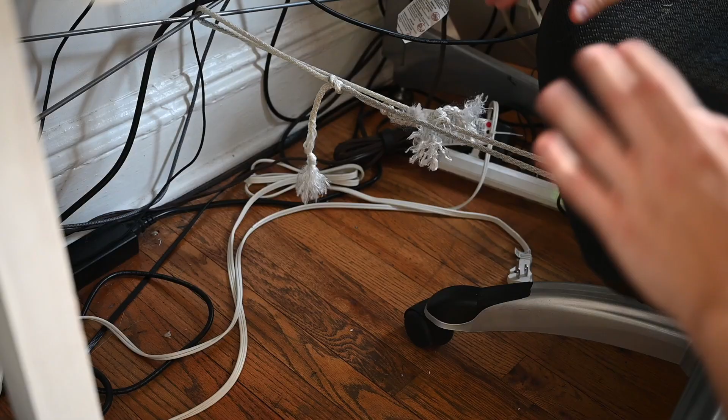This is under my desk, and this is a rope. I need this rope to tie my chair to my desk, or else this will happen.

Fuck this apartment. So I've been using a couple different tricks to try to level out this apartment to the best I can. So you saw the rope one, but I've also been using paper under a couple different pieces of furniture. But for the really big gaps, I've been 3D modeling and 3D printing some functional parts.

So this here is one of the first parts that I actually 3D printed for this apartment. Now, I've been 3D modeling and printing for about the past 6 years now, so I know a thing or two, and I'm going to walk you through sort of my process for making a functional print like this.

This guy is a cube cut out of a cube. Most of my 3D modeling happens through this one program called OpenSCAD. We're going to get more into that later. So I messed up the dimensions slightly, and that's why it kind of looks gross in the back here.

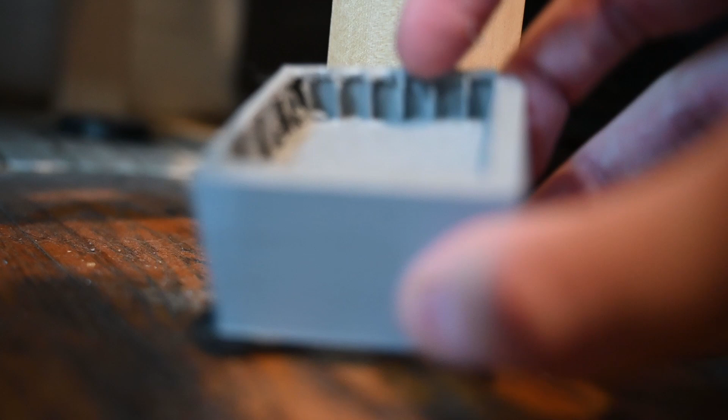I had to cut away a little bit of the plastic with a knife so that it would fit the dimensions of this square leg here. When modeling something for real life, you really want your dimensions to be close, but leave a little bit of room for error. So you want to make your print slightly larger if you want something to fit inside of it, and slightly smaller if you want your print to fit inside of something.

The usual recommendation for this room for error, which is called tolerance, is about 2 millimeters. Another thing you gotta take into account when figuring out these dimensions is something called shrinkage.

Male viewers may have a little bit more experience with this concept than others. The printer prints things nearly to the exact dimensions you give it, but as your print cools, it will ever so slightly shrink in size.

When solids are heated up, they tend to grow, and when they get colder, they shrink. We're printing this plastic here at about 400 degrees Fahrenheit, so by the time it's back down to room temp, your print may have shrank up to 1% in scale. Get a little tolerance so it doesn't look like this.

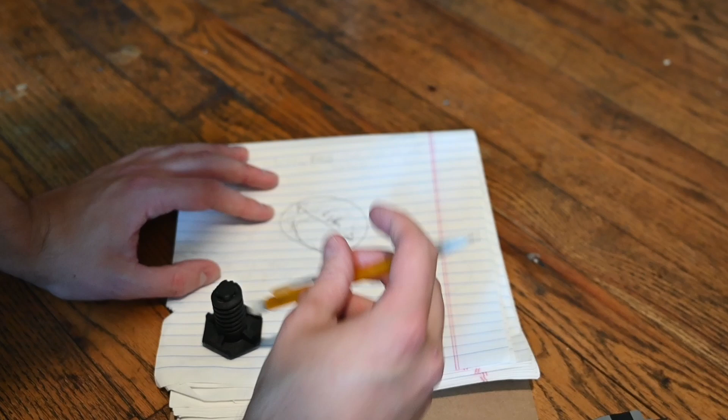Now that I figured out that the largest diameter of this hexagon is 40 millimeters, I can start designing my model to accommodate it. I'm going to have an inner divot in my print that is 40 millimeters across, plus the tolerance so that this piece will actually fit inside. So I'm going to bump that up to 42 millimeters on the diameter.

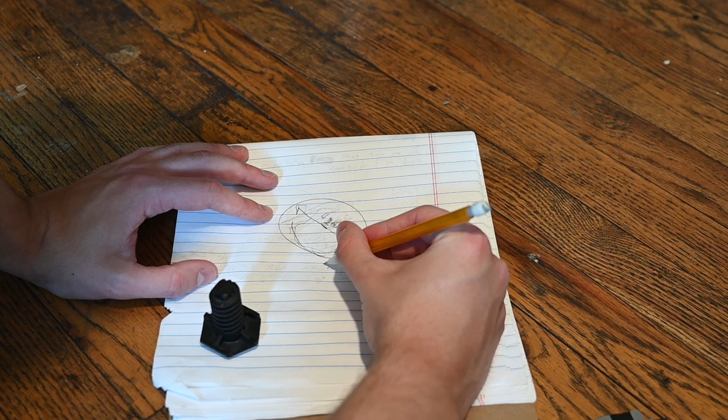Okay, so that's 42 millimeters across. Then I'm going to add a 2 millimeter lip to go around it, like so. The last measurement I need to figure out here is this drop measurement of this cylinder, because this is going to essentially be one cylinder to lift this up, and then a little cylinder cut out of the top so that this foot has something to fit into.

So the last measurement I need is this here. And to figure that out, I'm going to use a level. Now this won't necessarily be easy since my girlfriend is not present at the moment. I'm going to have to figure out all this shit on my own.

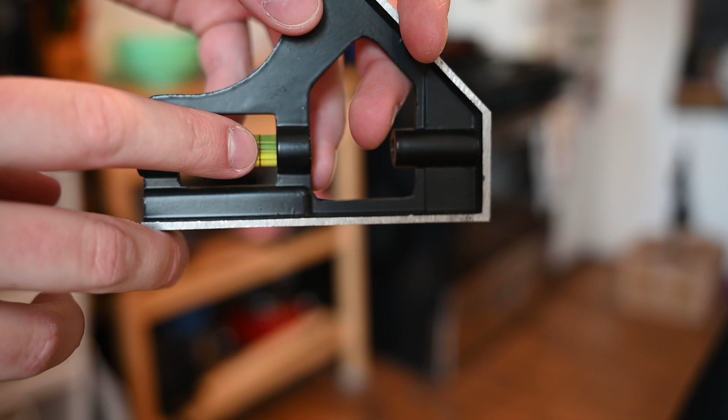What I need to do is use this level here. I'm going to use this little bubble inside to see how far I need to lift up my stove until it is level. And since it's bowing down in that direction, I'm going to point the level that way because that's the way I want to level it out.

I will then push this until the bubble is completely between the two lines, and then I will figure out the gap. I'm going to try to brace as much as I can without having to lift so I don't throw out my back.

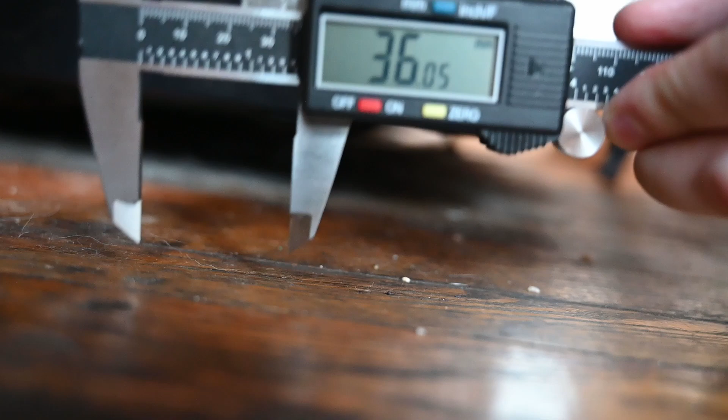That is about 35, 36 millimeters. And the good thing is, since this actually has some travel on it, I only really need to boost this up probably 32 millimeters. And then I can just use this foot and twist it to get this in the right shape.

So what I'm now going to do is go into OpenSCAD. I'm going to make the dimensions of everything that I need, and since I'm recording it, I'll just give a quick walkthrough. This is dead simple, so this shouldn't take very long.

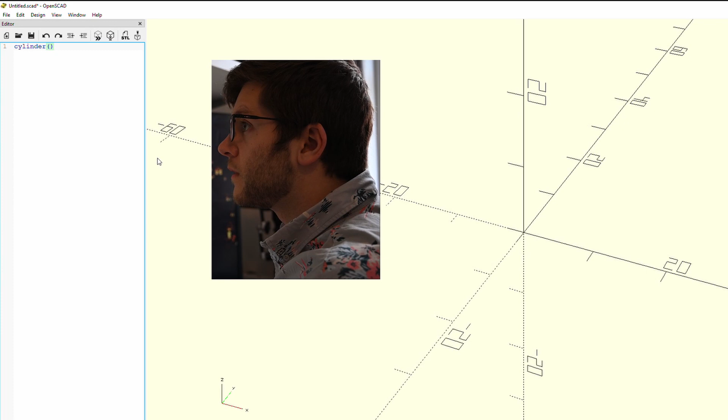And then I'm going to make another cylinder with a height—height doesn't necessarily matter because this one will be deleted from the other one—and a diameter of 42, which is another one that we decided. So I make these, and we have our 2 cylinders. They look fine, but one's on top of the other.

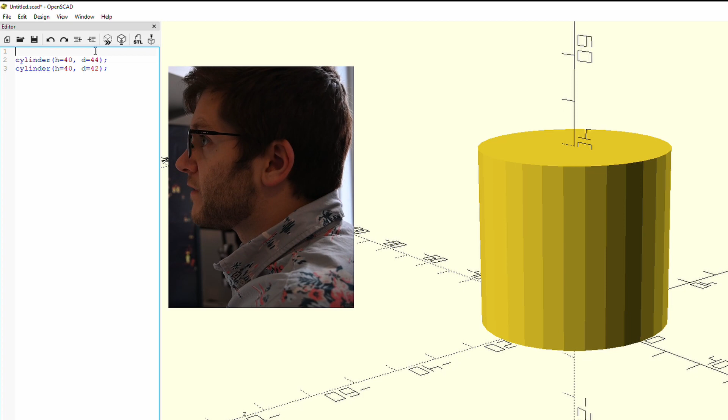So now we're going to have to do a little bit of difference between the two. If I do this, check this out—I render it, and now we're getting there. We see that we've now chopped out the small cylinder from the big cylinder, but I only want a little bit of chop out.

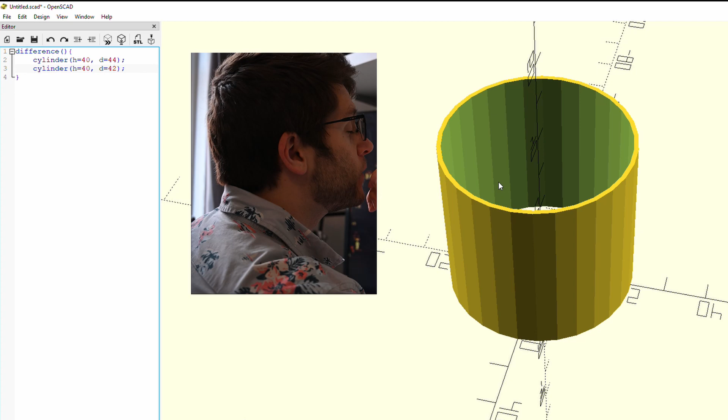So what I'm going to do is translate this guy up to the distance required—0, 0, and then the Z direction, which is vertical. I will translate that up 32, which is how much we wanted. And there we go, that's it.

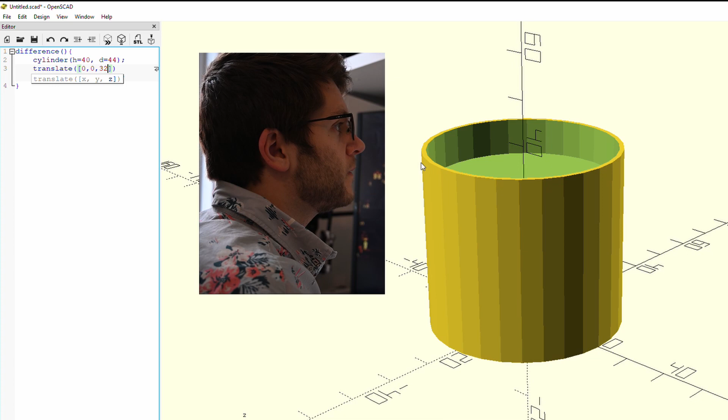I'm actually going to bump up the wall thickness to 4 millimeters just to give this a little extra breathing room, but that is our foot.

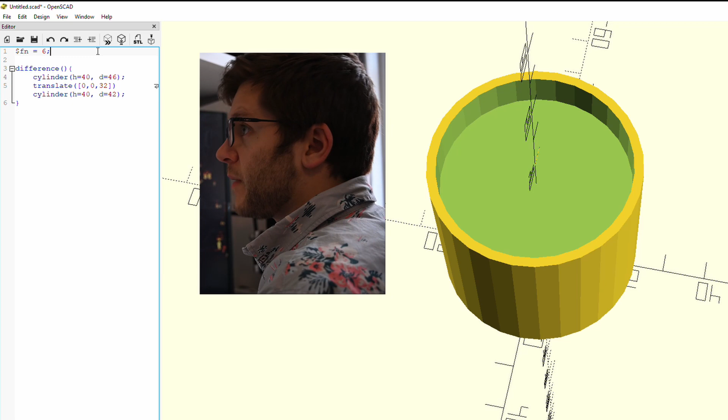I could do a couple different things with it. If I wanted these to be hexagonal, I can use this $fn function, and I can pump in a 6, and this reduces the number of polygons each of the sides have. I think that actually looks a little bit nicer—I might go with this instead. Yeah, 42, height of 40. This only really needs to be 36, I think.

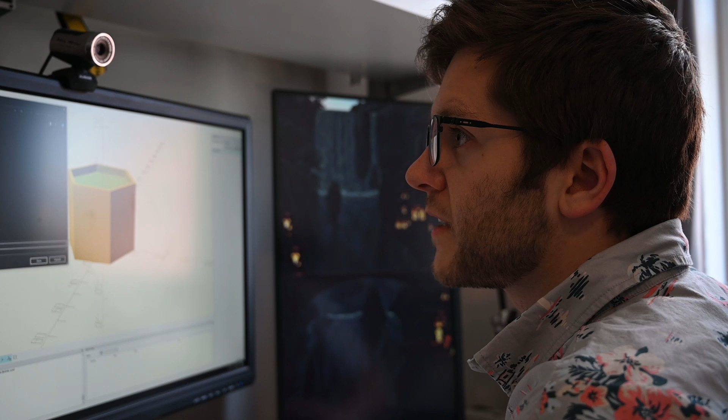Yeah, that should work. Okay, done. So I will save this and call it oven foot.

That's about it. I will punch this onto an SD card, print it, and then I'll see you in a little while.

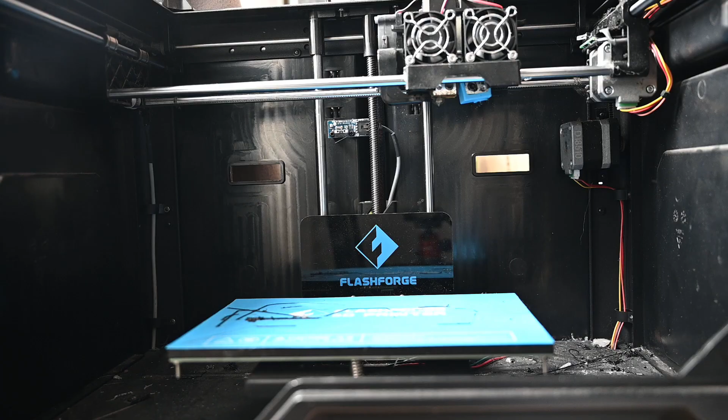This is my 3D printer. It is a FlashForge Creator Pro, a dual extruding printer. Do I recommend this? No, you can save so much money by getting a single extrusion printer.

The only reason I ever alternate between extrusion nozzles is if one clogs, I just move to the other. That doesn't happen so much anymore since I did a full metal hot end replacement on this guy. Another modification I did was increasing the nozzle size from 0.4 millimeters to 0.8 millimeters.

Since I doubled the nozzle size, I can double the amount of plastic that I flow, which means I can print twice as fast. They're not quite as pretty, however, I don't really care.

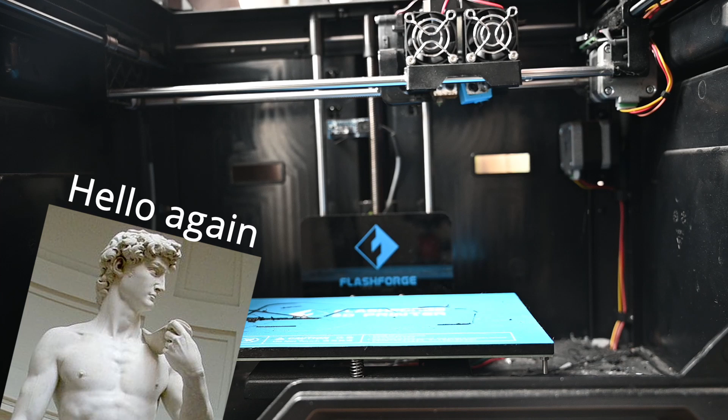3D printing works by a process called additive manufacturing. If you think of a marble slab that a statue's carved out of, it's the exact opposite way of manufacture. With subtractive manufacturing, all your product material is there, you just chip away the excess. Additive manufacturing, nothing's there, and you build your entire product, start to finish, from nothing essentially.

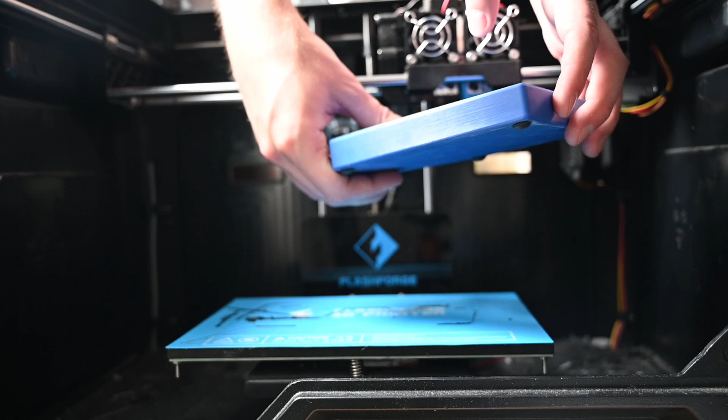The way 3D printing works is we raise the build plate up to the nozzle but leave a tiny gap, which is the space where the plastic prints. We print an incredibly thin cross-section of our 3D model, and when that cross-section is done, we lower the build plate slightly and draw the next cross-section. It's just adding together little fractions of your final product to get to your final product.

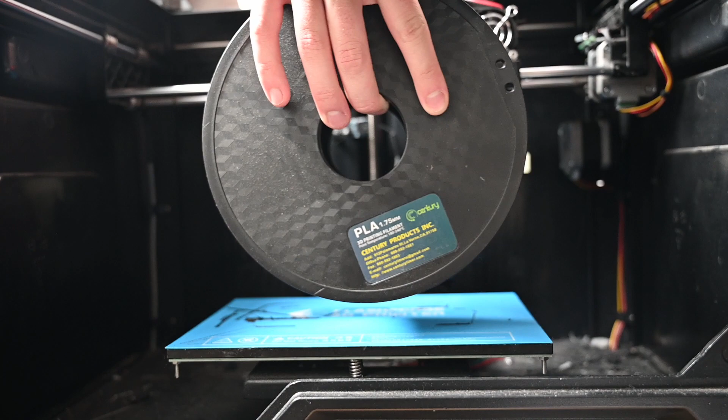3D printing uses something called filament, a thin string of plastic, typically 1.75 millimeters in diameter. It heats up the filament to around 400 degrees Fahrenheit, about 200 degrees Celsius, so it reaches its melting point. Then it cools back down to room temperature, becoming solid again.

Now, how does the 3D printer know what to print? Well, first we design the 3D model on my computer, then we run it through something called a slicer. The slicer digests the 3D model and converts it into a series of machine instructions that the 3D printer knows how to follow.

And that's it. I will see you in 45 minutes, and then we're going to install this foot together.

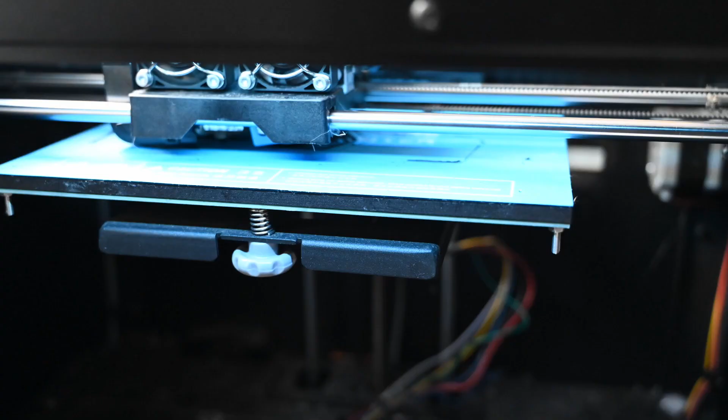And just like that, we're done. We got an oven foot to balance out our oven. Only took about 45 minutes to print, and then you gotta rip it off the print bed - always a little bit of hassle, especially with PLA plastic.

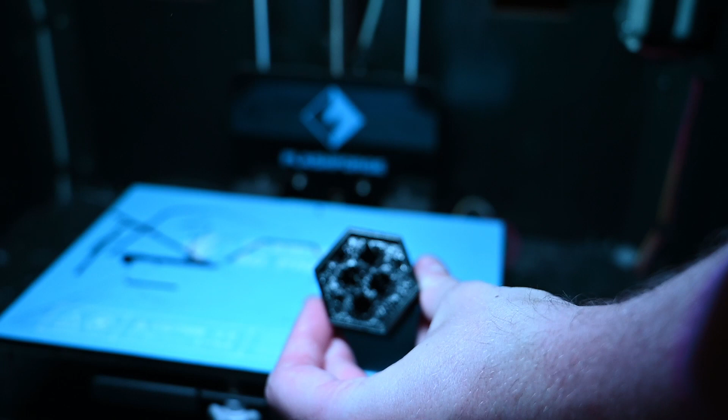Then you can walk it on over to the oven, stick it on underneath, and raise that puppy up to the height God intended. And then you're done, and you can enjoy that oven the way it was made.

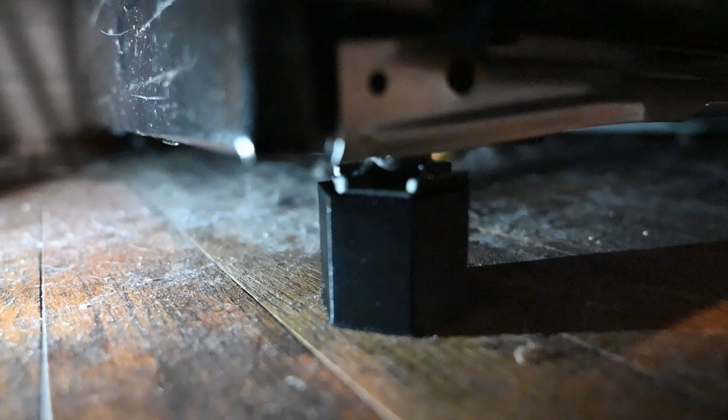That's even more level than I was trying to get it at previously, so nice - in every which way it's level.

And now we can enjoy this stove for the remaining - oh, we're so out of focus - we can enjoy the stove for like the 1 or 2 weeks we're remaining here.

You're nice. Yeah, well, he's nice. I'm okay, I didn't do anything. But he leveled our stove. Yes, I did. And our dog's barking! Come here, Barky! Who's a good Barky?

Hell yeah. Should have done this a year ago. Or a year and a half ago.